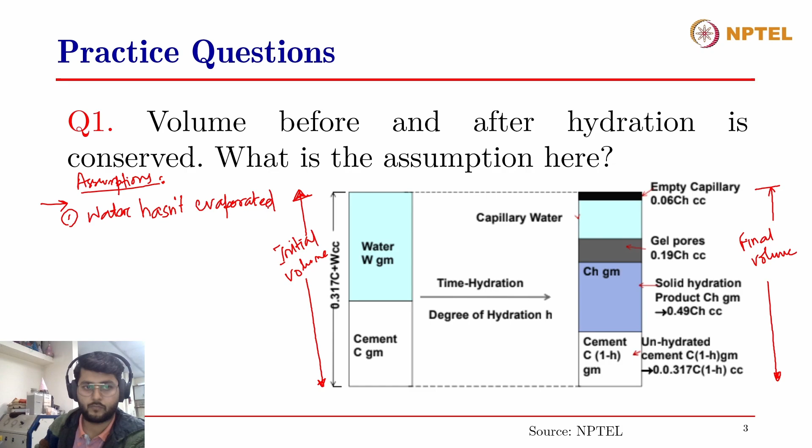Okay, one was answered by Divya - it is that water hasn't evaporated. We are assuming that. So when there is a change in volume, we call it in mechanical terms - or rather, a reduction in volume is called shrinkage, while increase in volume is called expansion. So we are assuming that there is no shrinkage occurring when we are doing volume conservation while talking about the before hydration and after hydration state of cement.

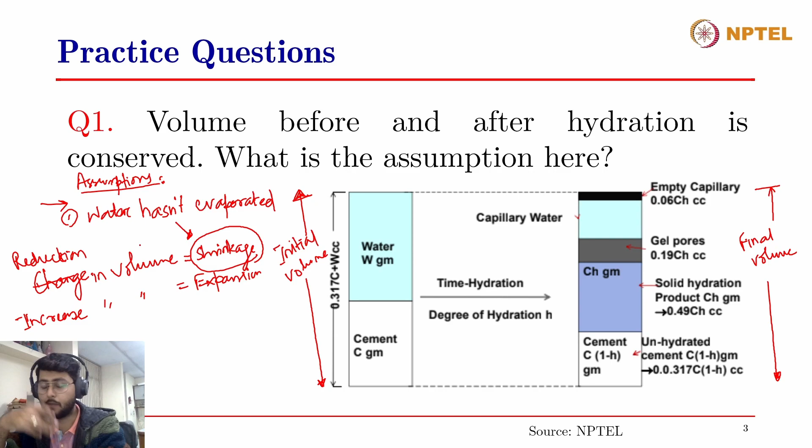So there are several types of shrinkage that cement can undergo during and after its hydration process. This starts with the first one, called chemical shrinkage. I'll briefly discuss all these types of shrinkage that we have assumed while conserving the volume, because these might also be discussed later on in the course.

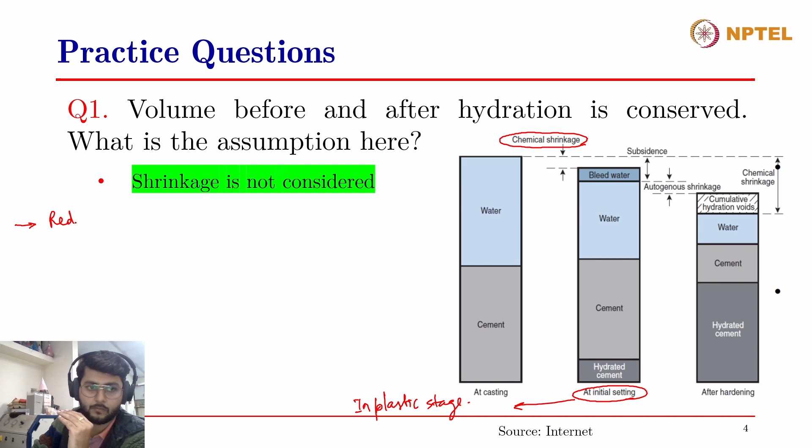So first is chemical shrinkage. What is chemical shrinkage? Does anybody want to answer? Okay, chemical shrinkage is when the cement is still in its plastic stage. The initial chemical shrinkage is the reduction in volume due to the formation of early hydration products.

So as we know, the volume of early hydration products is lower than unhydrated cement plus water. So this part is due to this - it is chemical shrinkage because the volume of hydration products is lesser than the total volume of the unhydrated cement plus water, right?

Now there could be bleeding. Let's say there is a certain amount of segregation. This is for the first type of shrinkage, chemical shrinkage. Then there could be bleeding in the mix as well - let's say your aggregates, there is segregation in the mix. Segregation is the settling down of heavier particles while the lighter matter comes on top. So your aggregates are trying to settle down, and the bleed water gets accumulated on the top, forming a film.

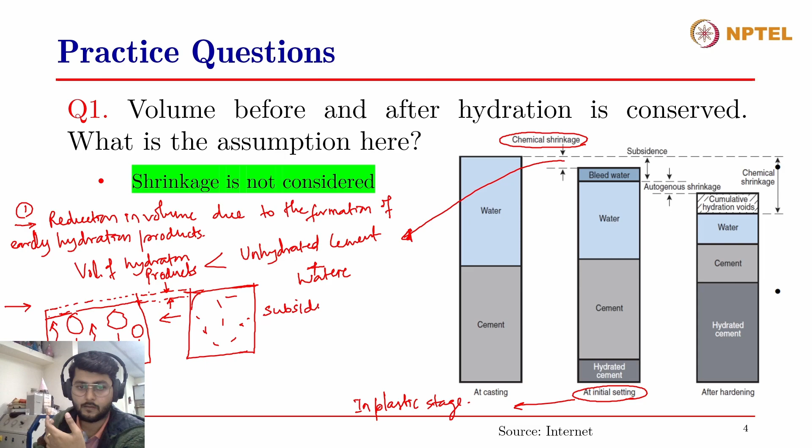And when this film is formed - initially the volume was this much, when you cast a cube or something, and this was a more or less homogeneous mix. But with time, due to segregation, the heavier particles have settled down, while the bleed water has accumulated at the bottom... no, on the top, and therefore this difference in volume is called subsidence. That is, the cement or concrete has now subsided or acquired a lower volume, while the top portion has been accumulated with water. So this is known as subsidence.

So this is the total of this - this is the first one, chemical shrinkage. Then, while it's just starting to set, this is the second one, subsidence. When the cement or the concrete is just starting to set, then there could be autogenous shrinkage.

And autogenous shrinkage is also known as self-desiccation - autogenous shrinkage after the setting is known as self-desiccation. This is when there is already a rigid framework of the hydration products, because it is already set. So there is already a rigid framework of hydration products, and since the cement is still undergoing hydration, it is taking water from the capillary pores. Since it is taking water from the capillary pores, there is a suction process going on, and therefore there's a shrinkage in the volume.

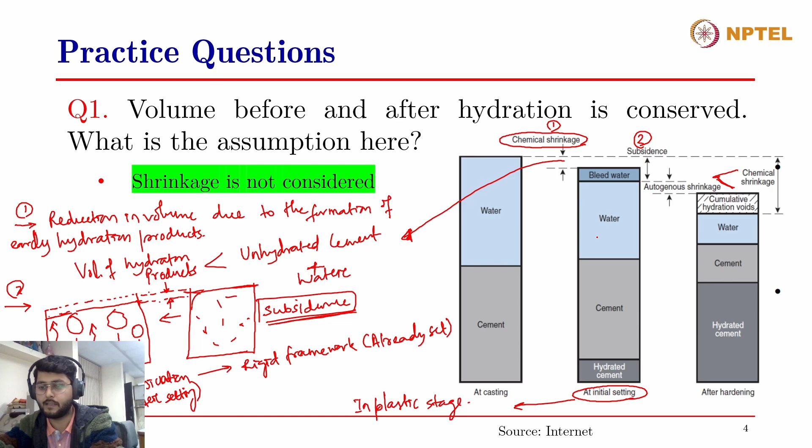All right, so these are the different types of shrinkage that occur within a few hours to one or two days of setting, right? Now we are going to look at other types of shrinkage that can occur up to years after the casting.

The first one is plastic shrinkage, which is basically drying of water when concrete is still plastic. It occurs within the first few hours of casting or after the addition of water.

Then comes thermal shrinkage. What is thermal shrinkage? Can anybody answer?

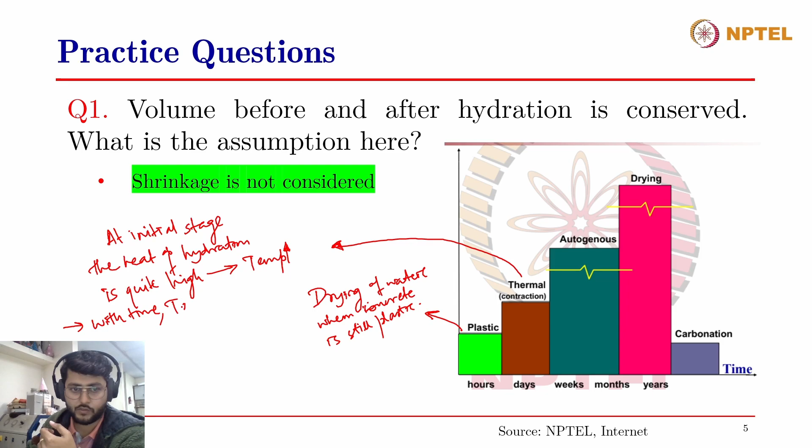Thermal shrinkage is basically when water is initially added to the concrete, chemical reactions like dissolution and precipitation occur at a very high rate, and therefore the heat of hydration at the initial stage is quite high, hence temperature is high inside the concrete. But with time, the temperature reduces. Now why? When the temperature is high, the volume is higher because volume expands when temperature increases.

But when the temperature is reduced, the concrete has cooled down several days after casting. Now that it has cooled down, the expanded volume wants to contract, so there is shrinkage. And since it has been several days after casting, the concrete has hardened. Now that it wants to undergo shrinkage, there might be cracking in the hardened concrete due to thermal shrinkage.

Plastic shrinkage also undergoes certain kinds of cracks. You can see this when you have cast a small sample, a cube, or some specimen, and left it open without sealing it, exposed to the environment. Certain map cracks are visible on the top surface of the cast sample, and this is due to the combined action of chemical shrinkage, autogenous shrinkage, and mainly plastic shrinkage, because the water on top is evaporating, so the top layer tries to shrink and undergoes small cracks on the surface.

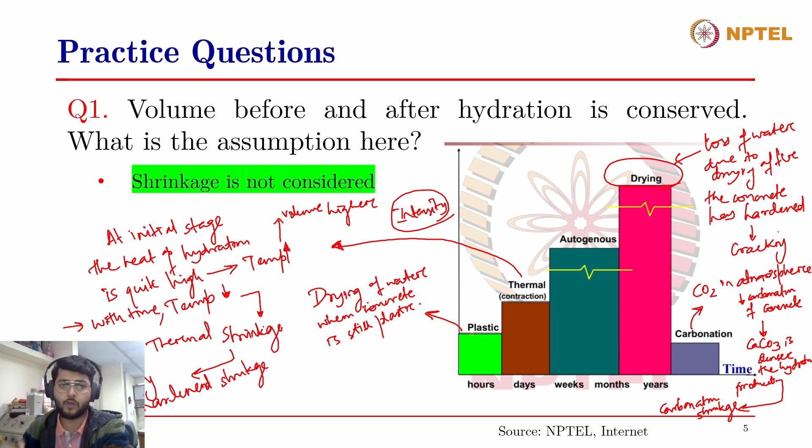So that answers our first question briefly. We discussed all the different types of shrinkage, and since shrinkage is not considered, we are able to conserve the volume before and after hydration. Moving on to the second question: what is the standard consistency of cement paste? It is the water at which one of these options is correct, and you have to pick: optimum workability is obtained, full hydration occurs, open air voids are isolated to air bubbles, or maximum strength is achieved.

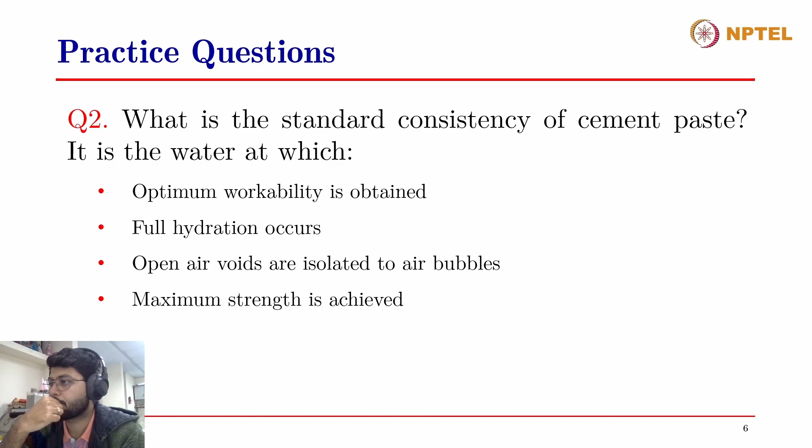I think full hydration occurs at standard consistency. How, why do you think so? Sir, standard consistency determines water content. Okay, what water content? It is the water required to produce the cement paste, which I think is 30% of weight of cement. So do you say that at 30% of weight of cement, meaning a water to cement ratio of 0.3, full hydration can occur? I don't know sir, please elaborate. Okay, thank you for attempting. Anybody else wants to try?

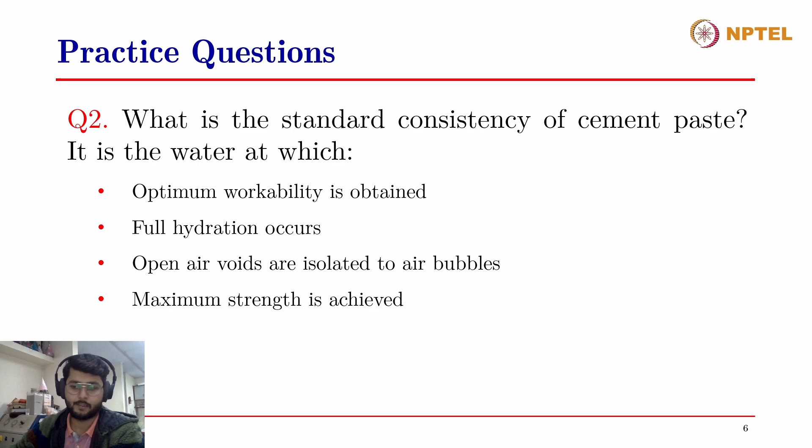All right, so the correct answer to this question is: open air voids are isolated to air bubbles. This is also discussed in the lecture as well.

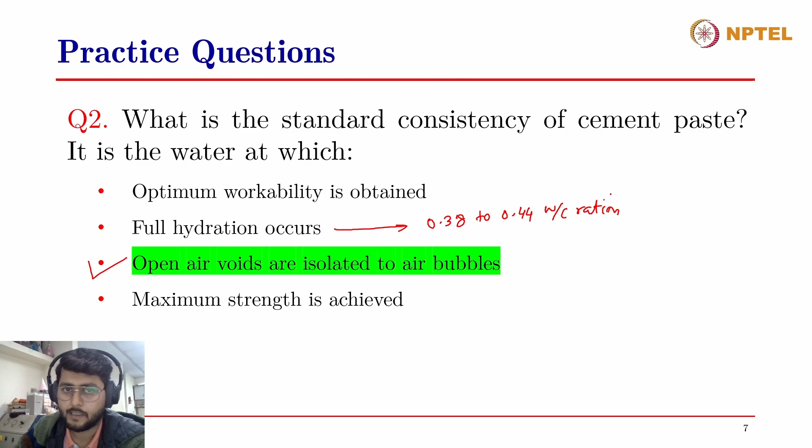It is not about full hydration. Full hydration, as you might have seen in the lectures, occurs around 0.38 to 0.44 water to cement ratio. And typically, the standard consistency of OPC, ordinary Portland cement, ranges between 26% to around 32%.

So this is not about full hydration. No, this is the wrong answer. Optimum workability is obtained - again, workability is a very subjective term, as workability is subjective to the kind of application that you're looking to make the concrete for.

For example, if it is a slab that you're going to cast, then you would want the workability to be such that the slump would be of that of a flowable concrete, let's say around 150 to 180 slump, and you'll be able to pump the concrete because there will be a congestion of the steel reinforcement on the slab or the raft. So you want your concrete to flow on its own and occupy all the spaces so that you'll have a perfect shape of the concrete element, as well as your voids will also be reduced.

There will not be any kind of honeycombing in the concrete element. So for a slab, you would want your workability to be such that the slump is around 150 to 200. But if it is a roller compacted concrete for a pavement, then you would want your slump to be zero. So in that case, the zero slump concrete is a workable concrete. But will that concrete work in the case of slabs? No, a zero slump concrete in the case of slabs is considered bad - it's a less workable concrete.

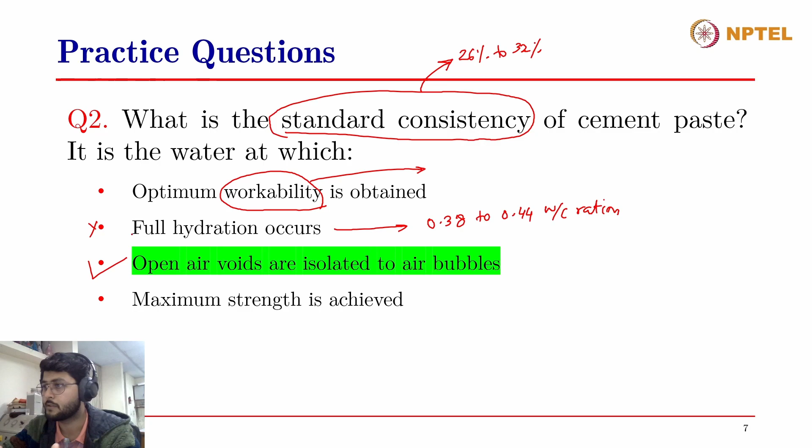While if it is a flowable concrete - we generally confuse flowable concrete and workable concrete. Flowable is the degree of flowability, or how high the slump is, in very crude terms. But workability is very subjective; it is related to the kind of application that you're looking for. If it is a stiff concrete that you want to make for a pavement, then you want a stiff concrete, and therefore the stiff concrete in that case is a good workable concrete. You don't want a flowable concrete there, like for a slab.

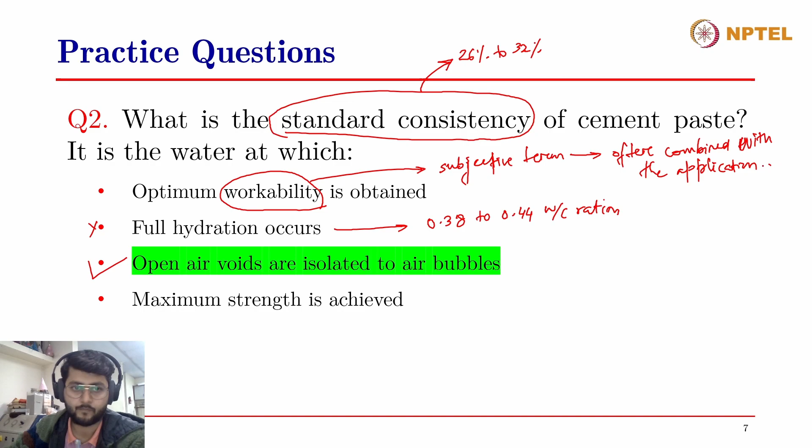So that's what it is - this is a subjective term, and often combined with the application of concrete. So optimum workability can only be defined when you're able to define the application. And standard consistency is a constant value for a given type of cement, and therefore optimum workability is not the right option.

Then comes: maximum strength is achieved. Strength - and this is the ultimate or later age strength I'm talking about - depends on a lot of factors. One could be degree of hydration, and the major factor that governs strength is porosity, because if the voids are less inside the concrete, then the strength will be higher, and so on. So there are a lot of factors that govern the strength, and not just the standard consistency of cement paste will ensure that the maximum strength is achieved.

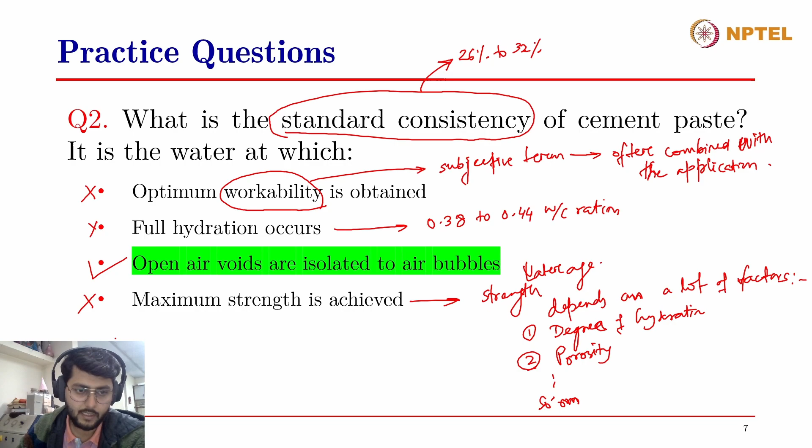So it is not the right answer. The right answer is: open air voids are isolated to air bubbles. This was also shown to you in the lecture as well. Let's say these are the unhydrated cement particles inside a given matrix, and this used to be the air void.

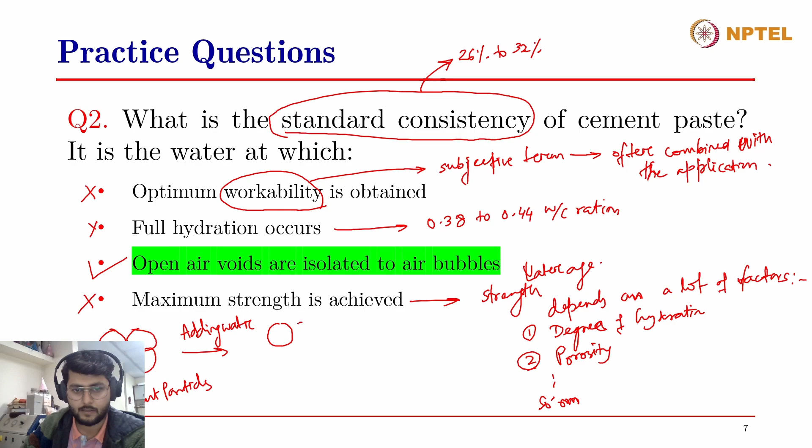Upon adding water, what happens is this void trapped between these particles is slightly filled by water, while there is still air entrapped within the voids, and it is connected - the air voids are connected.

But when the cement is at its standard consistency, what happens is the connectivity of the air voids is lost. The water takes most of the void volume, and the air voids are reduced to air bubbles. So the connectivity of air voids is lost.

Now what happens when the connectivity of air voids is lost? The water surrounds the air voids, and they turn into air bubbles. There's a lubrication layer between the air voids and the cement solid particles. This lubrication water within the solid particles allows them to move around, providing consistency and increasing the level of compaction inside the paste.

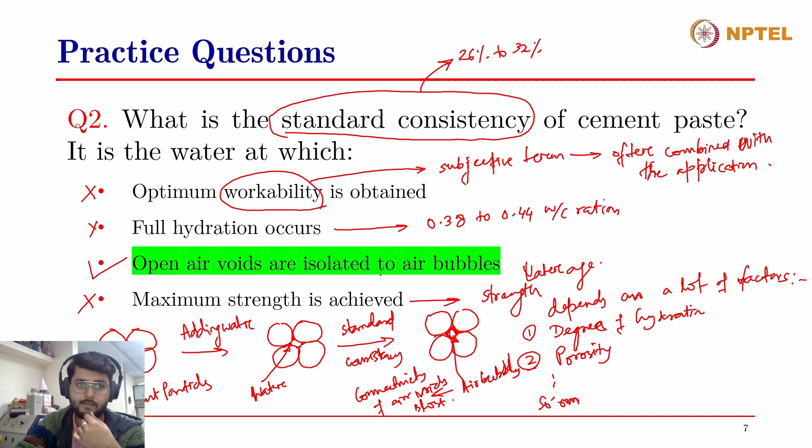Moving on to the third question. Fineness and specific surface area values can vary with the choice of method of measurement. You have seen two different methods: one is the Wagner method, and the other is the Blaine's apparatus method.

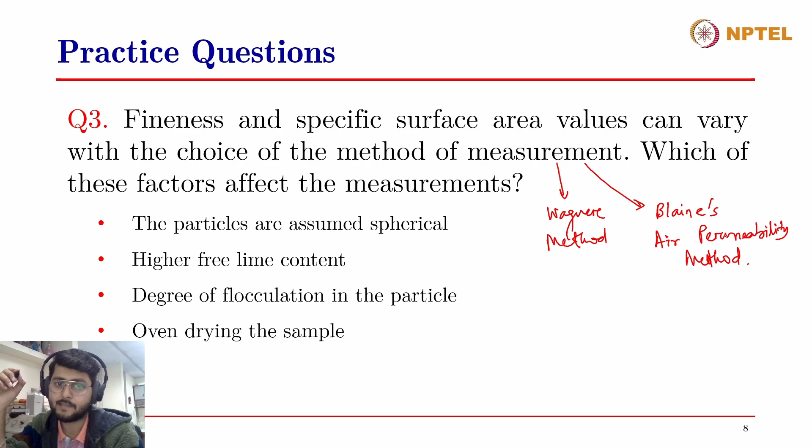Now the question is, which of these factors affect the measurements of specific surface area and fineness? The options are: the particles are assumed spherical, higher free lime content in the material, degree of flocculation of the particles, and oven drying of the sample. Which of these factors are expected to affect the measurements of fineness and specific surface area of cementitious materials?

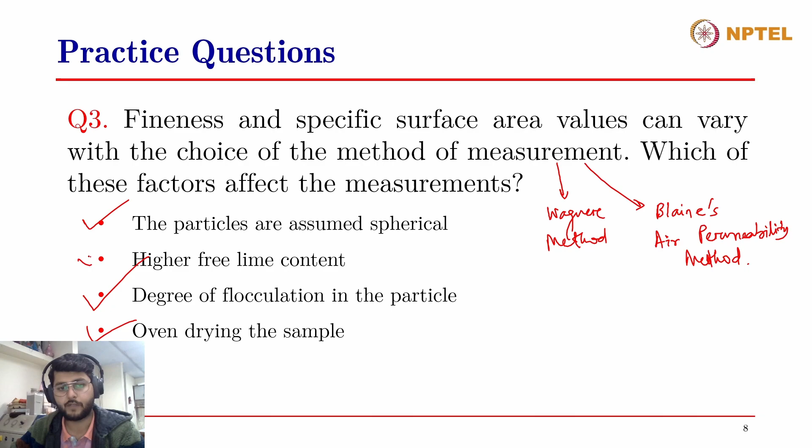All right, the correct answers to this question are: the particles are assumed spherical, and the degree of flocculation in the particles as well—not the free lime content. We'll discuss all these parameters one by one.

The first is that the particles are assumed spherical. I want to ask you this question: do cementitious materials have spherical particles? Let's say cement, clinker, silica fume, slag, fly ash, metakaolin, different SCMs. So do these types of SCMs have spherical particles?

Yes, only in the case of fly ash and silica fume, except for some other ashes—let's say volcanic ash and some other ashes. Except for these cementitious materials, all other materials mostly have irregularly shaped particles.

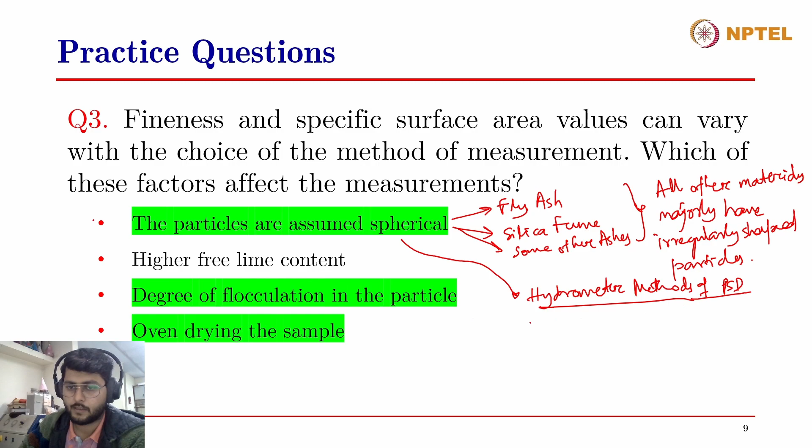You would have seen in the case of the Wagner method or the normal hydrometer method—the hydrometer method of particle size distribution—it assumes that particles are spherical and is based on Stokes' law. Based on the different sizes of particles, they will settle down and remain suspended at different depths in the water column, and from that you'll be able to calculate the particle sizes.

So the calculation assumes that all particles in the system are spherical, and this will also affect the results of fineness and specific surface area, because in most cementitious materials—clinker, limestone, slag, gypsum, cement, or metakaolin—the particles are irregularly shaped. Assuming them as spherical would only be an approximation and would not give us accurate results.

The second factor is the degree of flocculation in the particles. When the particles are in a flocculated state, air is entrapped in these particle flocks. If the particles are not dispersed properly, if these flocks are not broken, then the particle size distribution measurement will be affected.

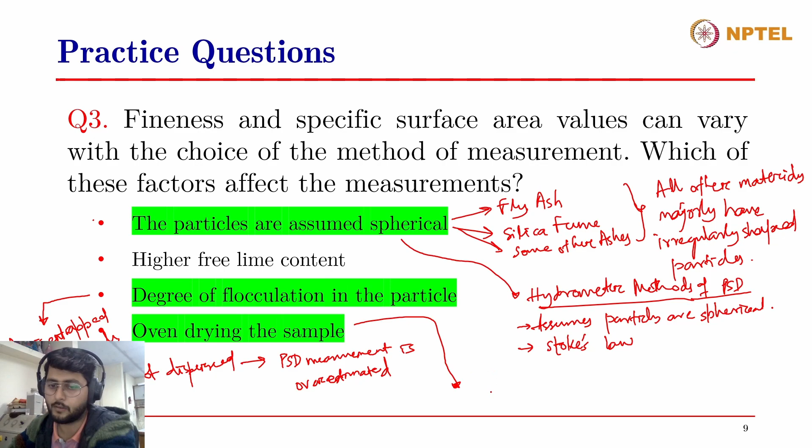Overestimated, right? And then the third is oven drying the sample. If the sample has some moisture in it, this moisture will also be entrapped in the air that is entrapped within the flocks of the particles, and that will get released in these measurements. This might also affect, depending on the specific gravity of the fluid, let's say in the hydrometer method, on the type of fluid you're using to measure the particle size distribution of your cement. That will also affect the measurements. So you don't want moisture present in the sample, and therefore oven drying is a must requirement for preparing your sample before carrying out this fineness test.

So moisture also affects the PSD measurements, right?

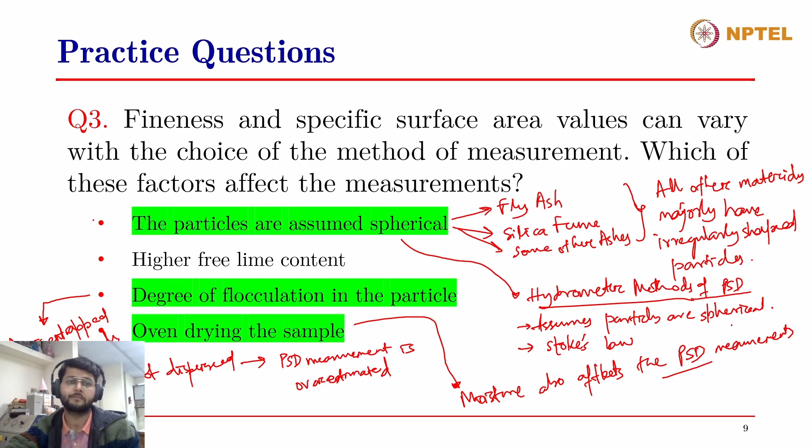Moving on to the fourth question: which factors can affect the specific gravity test of the cement using the Le Chatelier's flask? The choice of medium, kerosene or water; free moisture in the material; high C3A content in the cement; air voids in the material. Which of these options are correct?

Anybody wants to answer this question? The choice of the medium in which you carry out the specific gravity test, meaning it could be water, kerosene, or something else, will that affect the specific gravity test? The free moisture that is available within the material, will that affect it? High C3A content in the cement, the composition of your cement, will that affect the specific gravity test? And then air voids in the material, will that affect the specific gravity test?

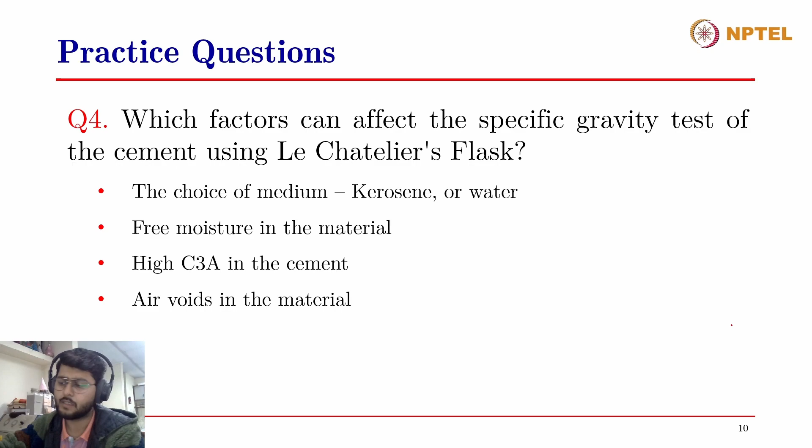Alright, the correct answers to this question are the choice of medium, kerosene or water; free moisture in the material; and air voids in the material. It could not be related to the C3A, as there is no known correlation between C3A content and specific gravity of cement.

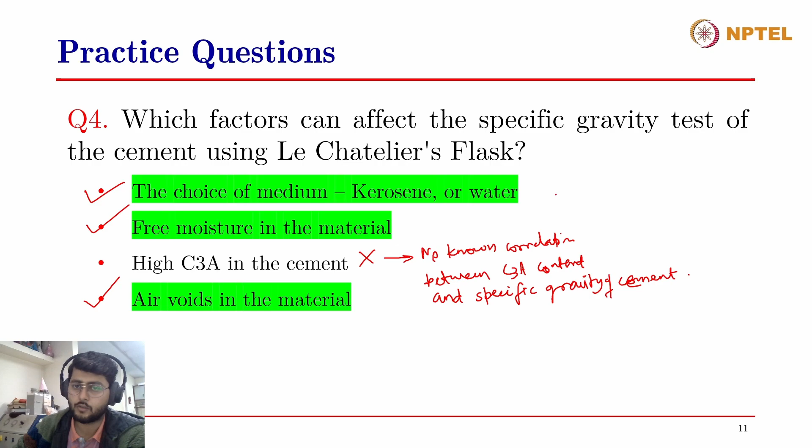Yes, of course the choice of medium affects it, because you can't carry out specific gravity tests in a water medium—it will react with the water, as you might know. So we use a medium that is inert. Kerosene is inert to cement, so the cement will not react, and this medium helps us carry out this test. The choice of medium affects this test.

Then the free moisture in the material, as discussed in the fineness measurements as well—if there is free moisture in the material, this moisture will get released into the kerosene, and since kerosene and water are not miscible, it will affect the specific gravity. So you need to oven dry the material prior to carrying out your specific gravity test.

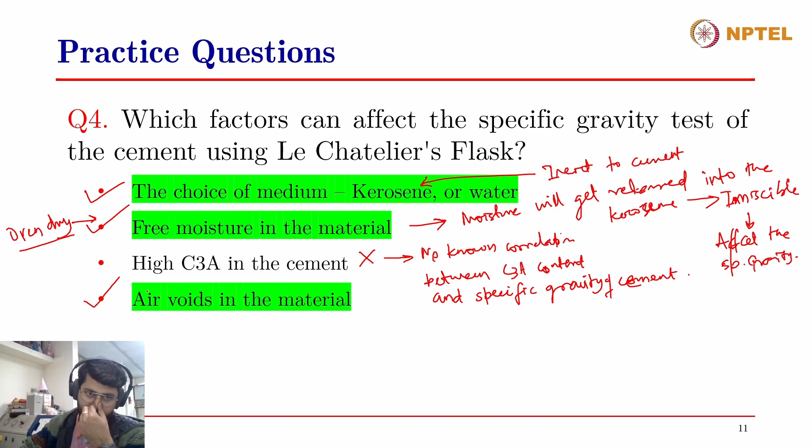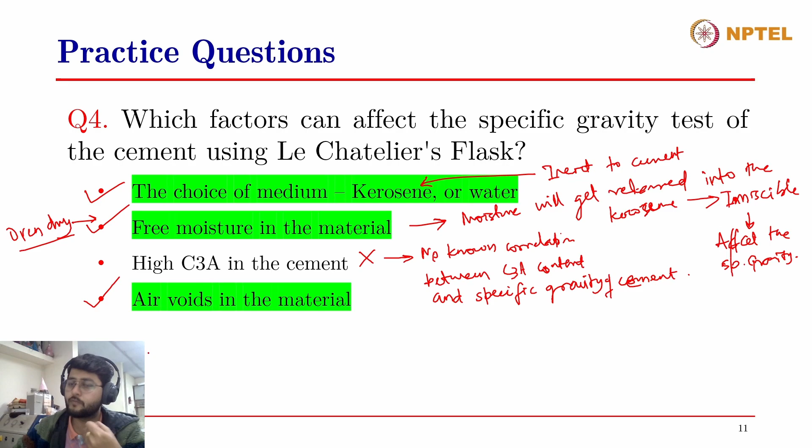The final one is air voids in the material. Yes, of course, when the cement is in its anhydrous state, when you take it out from a cement bag, it will have air voids within the solids. When we put it in the Le Chatelier's flask in the kerosene, we need to remove these air voids that are entrapped within the flocks or within the solids, because that will contribute to the volume measurement. If the air voids are not released, they will contribute to the volume calculations, and hence specific gravity will be affected.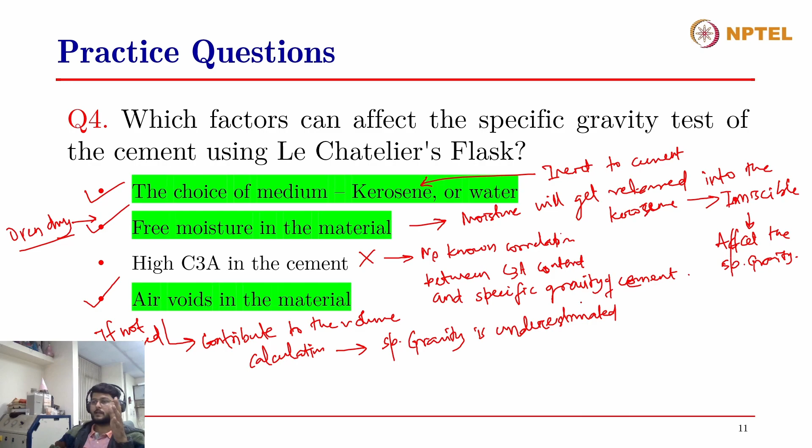Specific gravity is in fact underestimated, because if there are air voids trapped within the kerosene, there will be a higher volume change with a given amount of material, so the mass to volume ratio will be lower. We need to release these air voids so that we get the accurate specific gravity, so that the mass to volume is as accurate as possible—otherwise the specific gravity will be lower if there are air voids entrapped within the system.

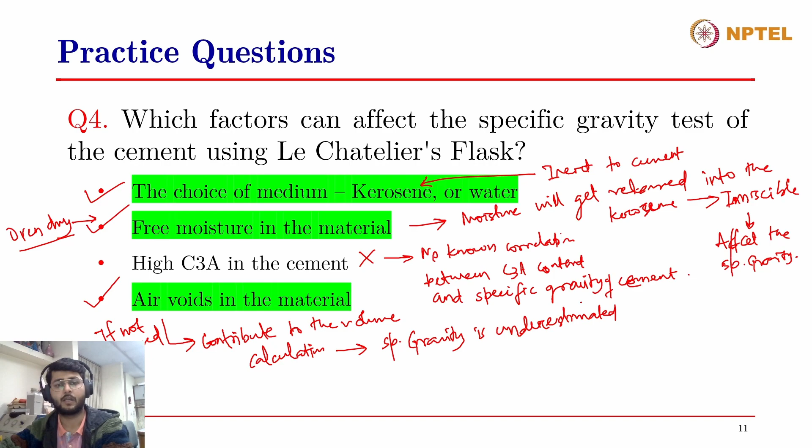Moving on to the fifth question: what contributes to the high early strength and rapid hardening in rapid hardening Portland cement, or RHPC? Is it the high belite content? Is it the high alite content? Is it the higher fineness or high aluminate content? Which of these options contribute to the high early strength and rapid hardening properties of RHPC? High belite content, alite content, higher fineness, high aluminate content. Anybody wants to answer this question?

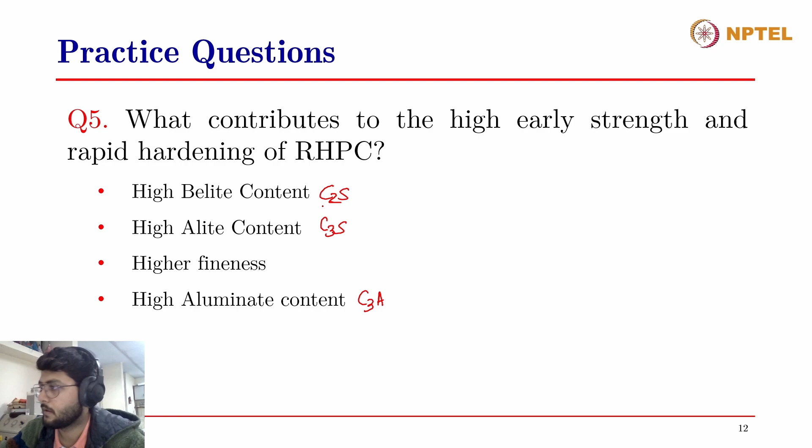Anybody else wants to try? Okay, the correct answer is actually high alite content, higher fineness, and high aluminate content, not the high belite content. You might have seen this in the previous week's lecture as well. So I'll just draw it over here for clarity.

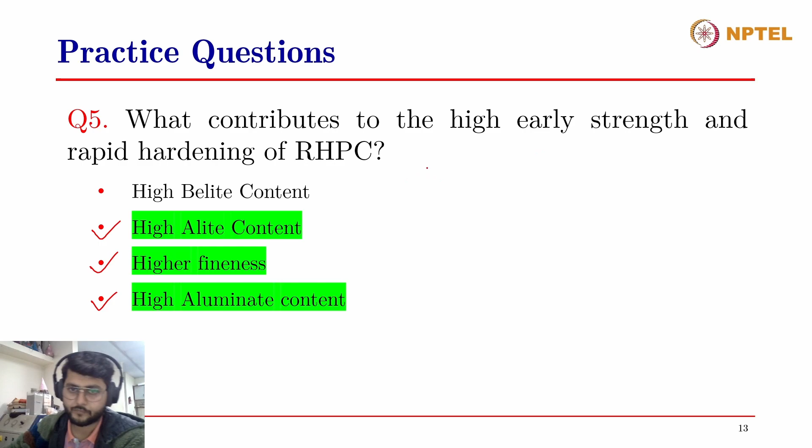This was a picture we also discussed in the last session - a typical compressive strength development of pure Bogue phases. This is time on a log scale: 28 days, 56, 90, and so on. In the pure Bogue phases, for alite, the strength development goes like this. This is C3S.

In the case of belite, the strength development goes a little slower initially, but it catches up with alite at the end. So this is belite. But in the case of aluminates or ferrites, the strength development is limited to like this.

So you can see that around 28 days, or in the case of early strength, the only factor that contributes to early strength is alite. Alite contributes to early strength. On the other hand, Belite contributes to later age strength, while aluminate does not contribute much to the strength.

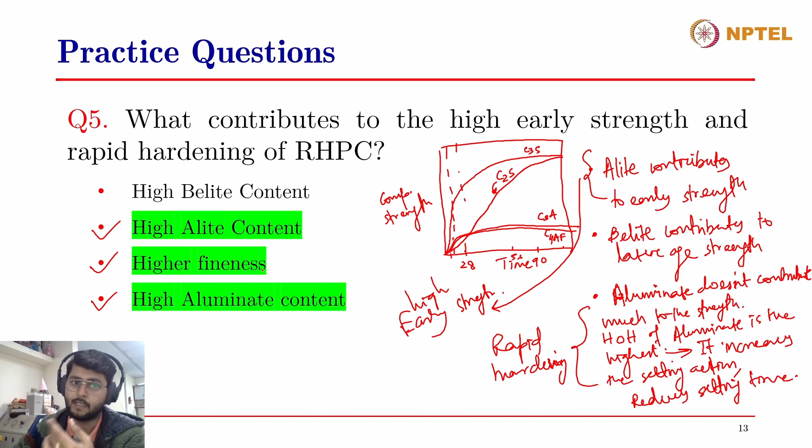But you'd have also seen that when we compare RHPC and OPC, the alite and aluminate contents are almost similar to that of OPC. So what contributes to the higher early strength then, if the alite and aluminate contents are still comparable with OPC? It is the higher fineness. So the last option is higher fineness.

Typically, when a cement is finer, it will have a large surface area. These large surfaces will act as sites for the hydration products to get deposited on them, and the dissolution action will also be accelerated when the surface area is higher. So higher fineness of cement increases the rate of dissolution of clinker phases.

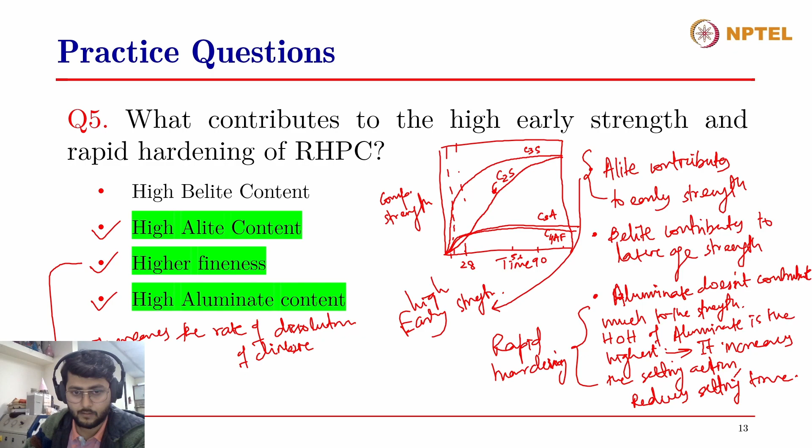So higher dissolution means a higher rate of hydration, and the higher fineness will also provide high surface area for the nucleation of hydration products. So therefore these three answers are the correct answers to this question, right?

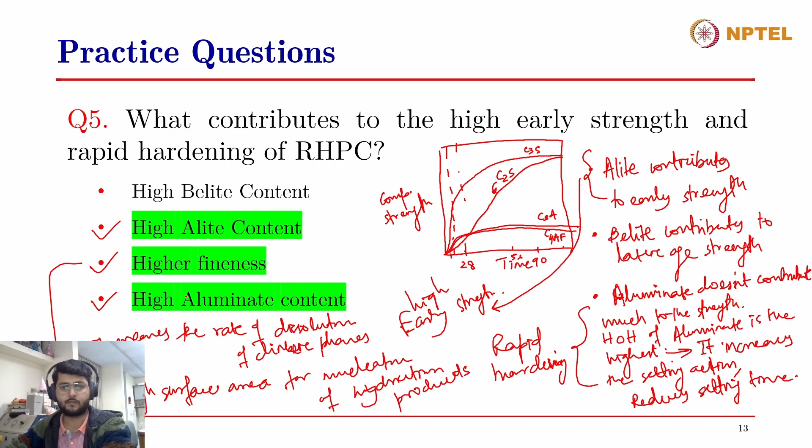Moving on to the sixth question: why is low heat cement used in mass concreting applications? This question doesn't have any options, so we would like to discuss it in detail as much as we want. Why is low heat cement used in mass concreting applications? Anybody wants to try?

What is low heat cement? Can anybody answer this question? What does the name suggest to you - low heat cement? Reduce the thermal cracking used.

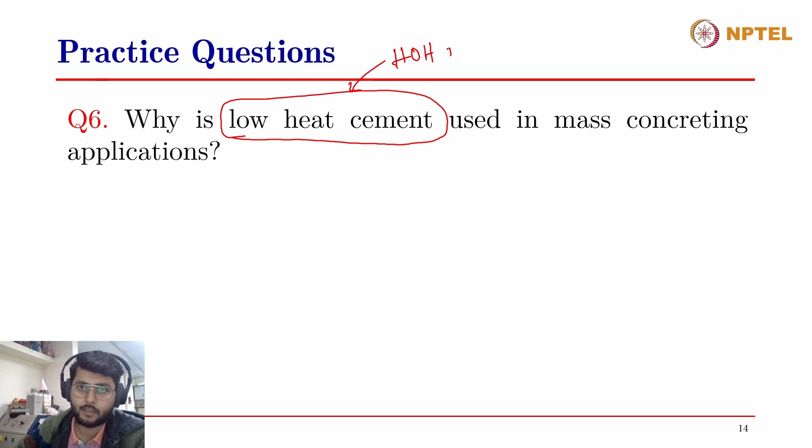Yes, I mean, you can say that in a sense. So, not going towards cracking, but low heat cement basically releases a low amount of heat - the heat of hydration is low. Since the heat of hydration is low, the amount of heat getting released while the cement gets hydrated is less, and therefore it is called low heat cement. Now, why is it used for mass concreting applications? What is mass concreting? Can anybody tell me?

You have seen this in the lecture as well, that in the case of mass concreting applications, we want to use low heat cement. What is mass concreting?

Mass concreting is basically where the size of the column elements, or the size of the concrete elements, is huge.

For example, piers that are built in rivers, large piers, dams, retaining walls, all the thick structures, thick rafts. The size of the elements are huge, right?

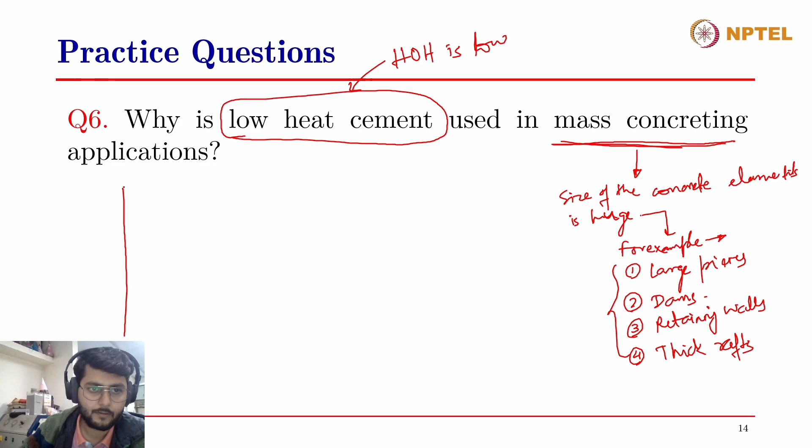Now, what happens in mass concreting applications is that since the thickness of, let's say we're considering a retaining wall, and it's huge, it has a high thickness, and the thickness is very, very high, right?

When the thickness of an element is too high, what happens is when the cement is added with water, it undergoes hydration, so heat is released. The heat is also released from the surface during hydration, while there is also heat being generated in the core of the structural element. This is the surface heat, and there is core heat.

Now, the surface heat has a way to get dissipated into the atmosphere, right? The surface is directly in contact with the atmosphere, so this heat can get dissipated from the structure. So the surface has a relatively low temperature at the surface. On the other hand, the temperature at the core is high, and therefore the core is now trying to expand - expansion in the core - while since the surface is at a lower temperature, it is trying to contract.

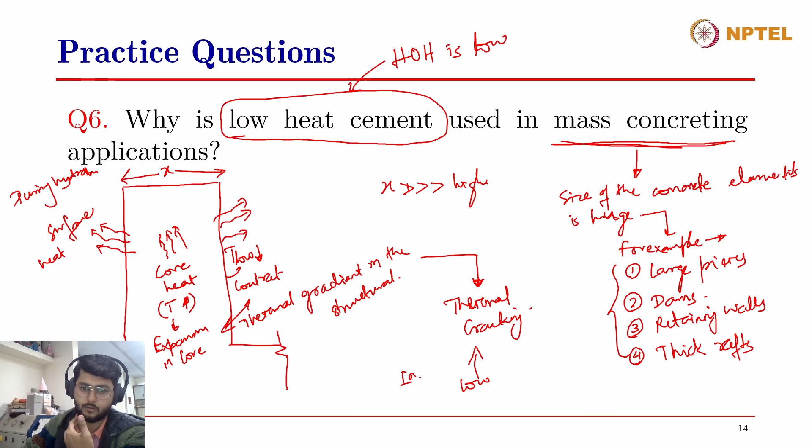So what is the solution to this? We introduce low heat cement. So when the heat released in the cement is very low, the thermal gradient will still be present because the surface is still exposed to the atmosphere, so it will have a lower temperature, while the core will have a slightly higher temperature, but the thermal gradient won't be sufficient enough to accentuate or accelerate the cracking in the structure. So therefore we want to use low heat cement.

Now what is low heat cement? Basically, as we mentioned, the heat of hydration is low. So heat of hydration will be low when the C3A content is low. So typically low heat cements contain low C3A content, low alite content, and high belite content.

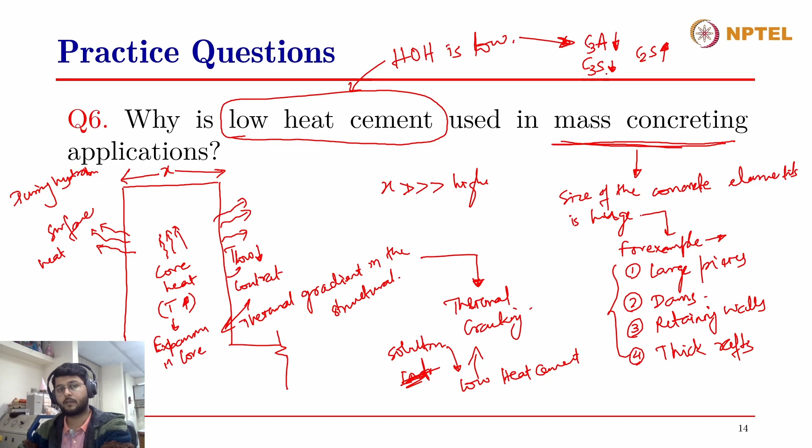Because we want ultimate strength in it, so we want a later age strength. We don't want it to harden, or we don't want it to have a high heat release in the first few hours of the pouring of concrete. So we want to keep the heat of hydration very low, so we reduce the aluminate content and the alite content, while we keep the belite content high, so that it will ensure a high later age strength as well. So this is why we use low heat cement for mass concreting applications.

Moving on to the seventh question: why does sulfate resisting cement require low C3A content? These two questions, sixth and seventh, are quite related to each other, meaning that low heat cement has lower C3A content, and sulfate resisting cement requires a low C3A content as well, lower aluminate content. What is the answer to this question? Why does sulfate resisting cement require a low C3A content? What is sulfate resisting cement?

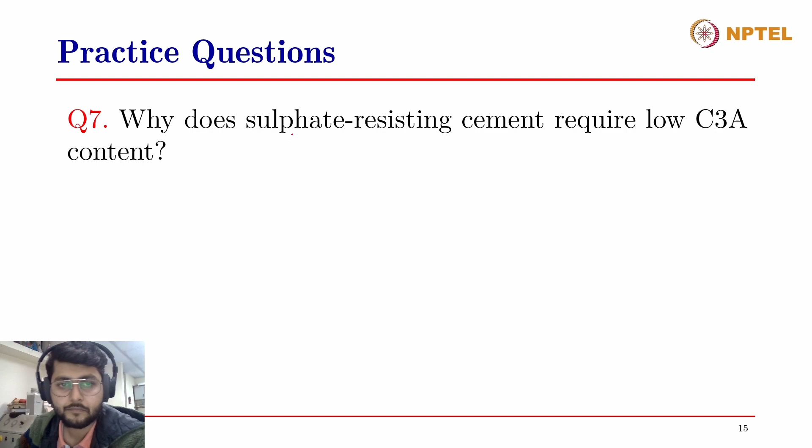Yes, anybody wants to try? These all have been discussed in the lectures, week 2 lectures. What is sulfate resisting cement? What does the name suggest to you?

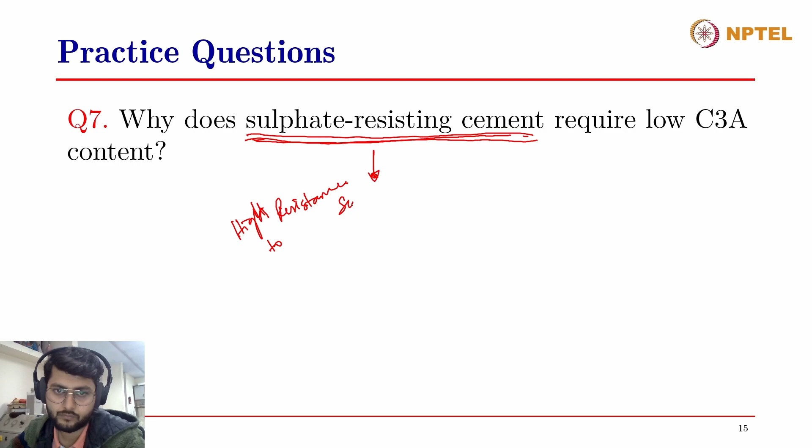What is sulfate resisting cement? It is a cement that resists sulfate attack, that has high resistance to sulfate attack.

Now, why does sulfate resisting cement require a low C3A content? What happens when there is a high C3A content and sulfates are induced at a later age to the concrete? What happens? Where do sulfates come from?

When we increase the C3A in concrete, deterioration is caused. How is the deterioration caused in the case of sulfate attack? What kind of deterioration occurs when there is a high C3A and there is a sulfate attack on the concrete?

Thank you, Vivek. So if the C3A content is high, and sulfates are introduced after the concrete has hardened, C3A plus sulfates will give rise to the formation of ettringite.

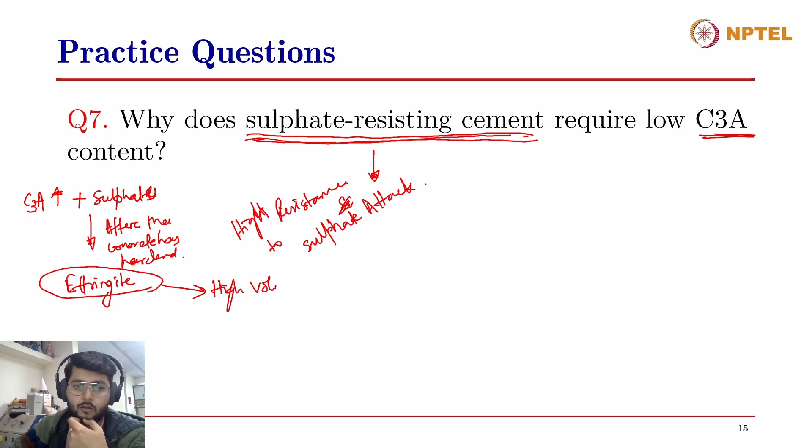And this ettringite has a high volume. When it precipitates in hardened concrete, it creates cracking. It induces cracking in the concrete.

So ettringite is not necessarily bad for us. We want ettringite to be formed in the system when the concrete is still flowable, in a plastic state. When ettringite is formed in the plastic state, which is the fresh state of concrete...

...ettringite formed in fresh concrete can occupy as much space, as much volume as required, because the concrete is in a plastic state, so there is high porosity, a high amount of voids in the concrete, and the concrete can readjust itself to the volume taken up by the ettringite.

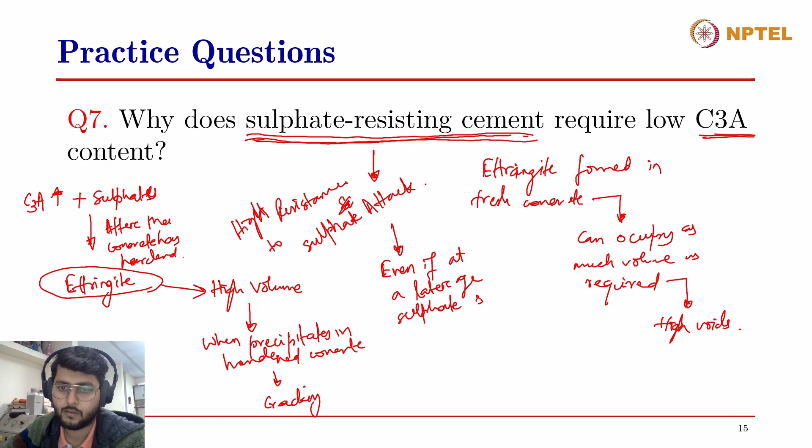So that even if at a later age sulfate is introduced to the system, C3A will not be available in sufficient quantities for precipitation.

So if the C3A content is low in the cement itself, then even if sulfate is introduced into the system at a later age, there will not be enough C3A left, and the C3A already present in low amounts will already be hydrated in the fresh state itself. So there will not be any unhydrated C3A left for ettringite precipitation to occur at a later age.

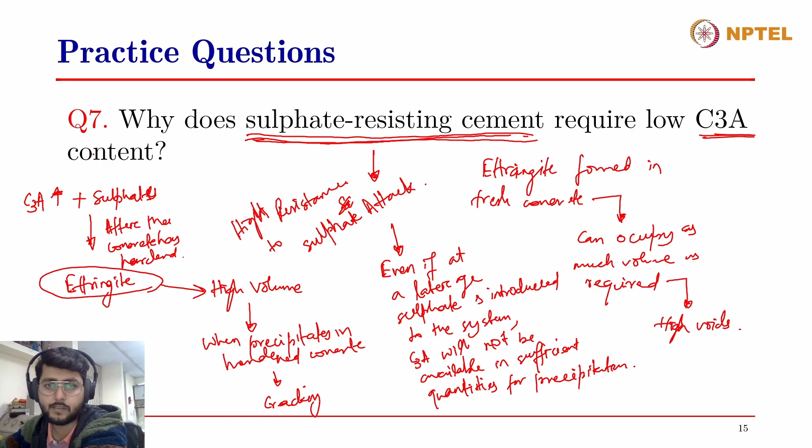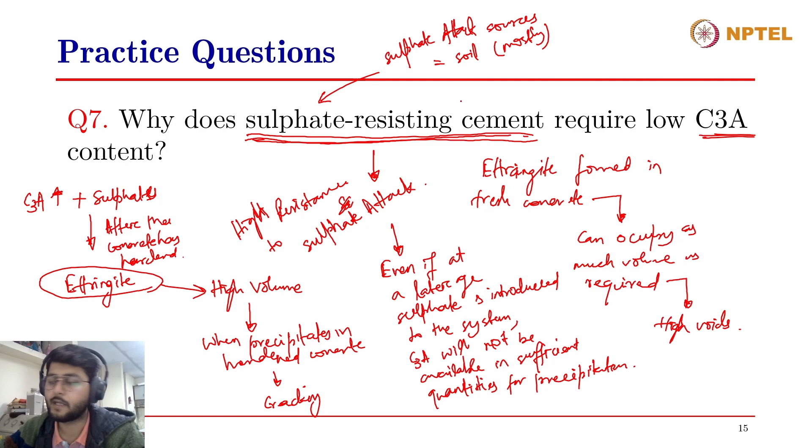Now, where do sulfates generally come from? How does sulfate attack occur? Sulfate attack sources are generally soil. So when the concrete element is to be made in contact with soil, we want to use sulfate resisting cement, so that when the concrete is in contact with soil, sulfates continuously coming or getting sucked from the water coming from the soil into the porous concrete won't affect the microstructure, because the C3A content will be low.

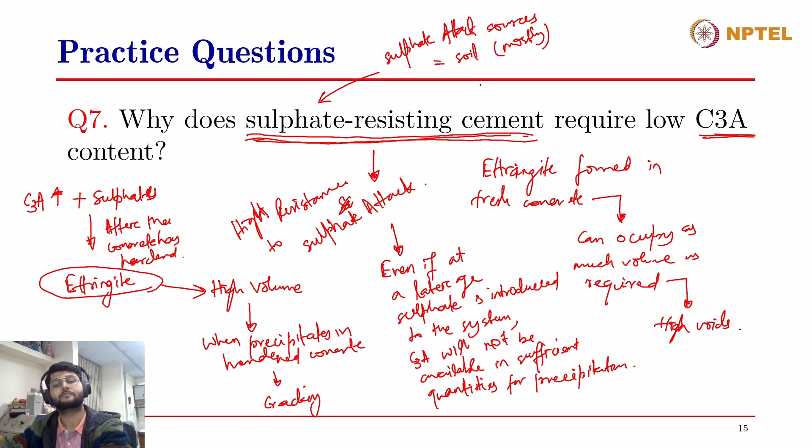Moving on to the eighth question: what is the difference between quick set, false set, and flash set? This is an interesting question. You might have heard about these different setting phenomena occurring in cement.

These are the basic three types of setting that generally occur in cement. What are the differences in terms of composition of the cement, or the relative concentration of ions in the cement or pore solution, that leads to these different types of setting behavior: quick set, false set, and flash set? What is the difference, and what leads to these different kinds of setting behavior in cement?

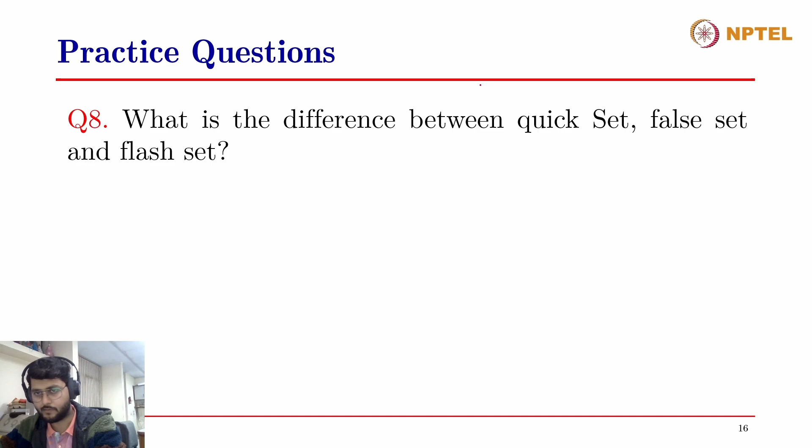What are these different types of sets? This might not have been discussed in the lecture till now, but we'll go ahead and discuss this. This is a very interesting phenomena that occurs generally in the setting of cement. These three different types of set are related to the relative concentration.

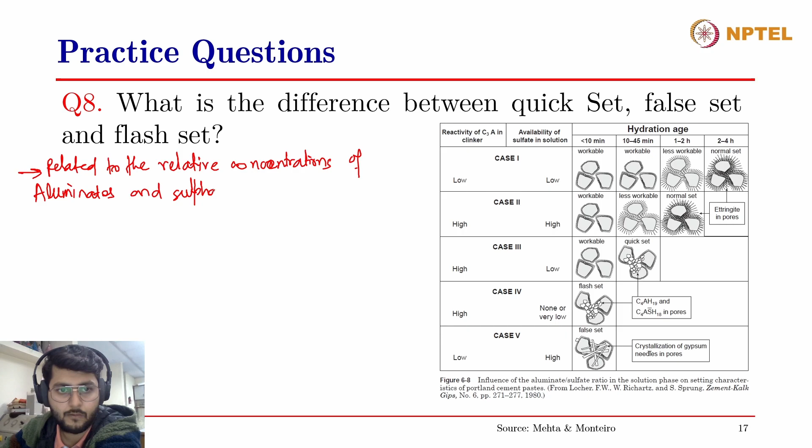Related to the relative concentrations of aluminates and sulfates in the cement. In the view graph on the right, taken from the book written by Mehta and Monteiro, this presents five different cases: the reactivity of C3A in the clinker and the availability of sulfate in the solution. Depending on the relative reactivity of the C3A and the relative availability of sulfate in the solution, the setting behavior is governed.

As you know, why do we introduce sulfates to cement or clinker? Why do we add gypsum to clinker? Because aluminates have a tendency to set very quickly. So if we don't provide enough gypsum or source of sulfates, it will form these hydrogarnet-like structures, leading to a very fast setting of the cement. Therefore, we want to have sulfates in the system.

In case 1, when the reactivity of the aluminate is low and the availability of sulfate is also low, we will have a high open time, higher workable time, longer workable time. Case 1: low and low. This leads to longer workable time, because since the C3A content is itself low, the cement remains workable for longer times, let's say 2 to 4 hours, and then after that normal setting occurs.

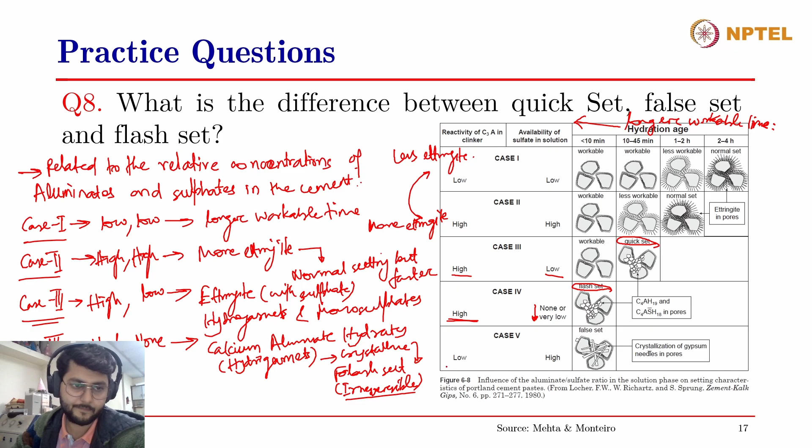The final case is that of a false set. When the C3A content is low but there is too high an amount of sulfate available in the system, these sulfates combine with the calcium coming from the different clinker phases and precipitate gypsum, and this gypsum leads to a false set. This false set is however reversible, meaning that if you rapidly mix the cement again, it will not set, and you can carry out the testing of the setting time. It will first show a false set, looking like the cement has set, but if you continuously mix it for some time, the precipitation of gypsum and the network will be broken, and you will be able to work with the cement and concrete. This is called a false set.

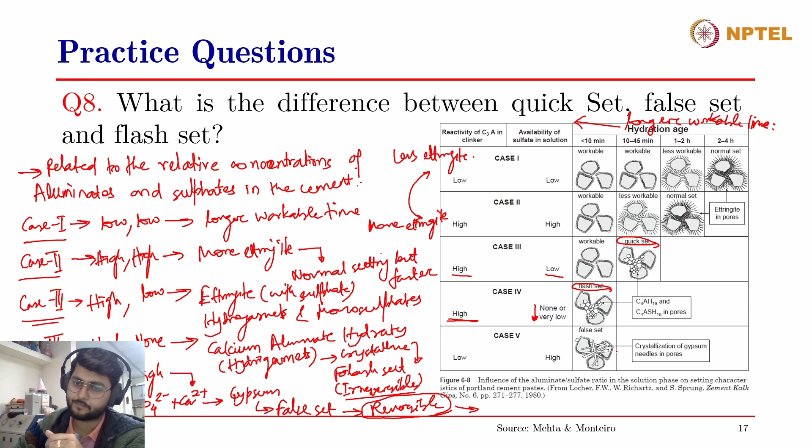So this is the difference between the different types of setting phenomena that occur in cement.

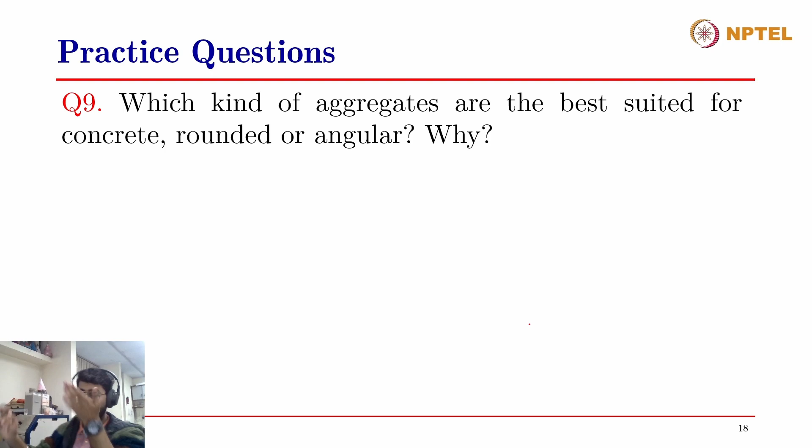Moving on to the ninth question, probably the last question of the session. Which kind of aggregates are best suited for concrete, rounded or angular, and why? You might have seen, and we have also discussed this in the lectures as well.

Rounded aggregates are formed from natural phenomena, like weathering, where the sharp edges of these aggregates get rubbed against different particles in nature, and therefore they get smoothened and rounded in shape. Whereas crushed aggregates are generally angular because they are crushed in a crusher, a jaw crusher. Which type of aggregates are best suited for concrete and why?

Angular aggregate. Angular aggregate is better for concrete. Why? Yes, sir.

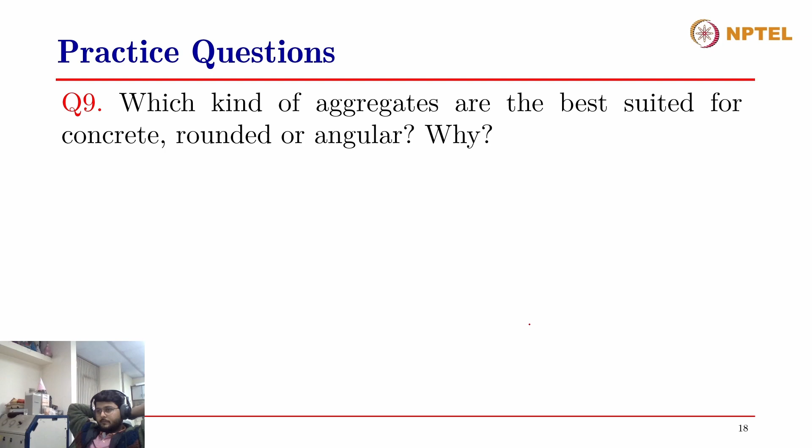Sir, angular aggregate is better as compared to round aggregate because of the interlocking effect in concrete. Interlocking effect, right? Beautiful, thank you.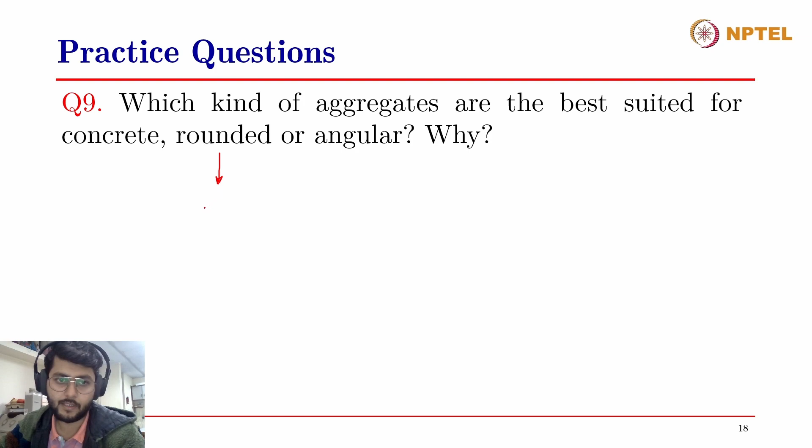Rounded aggregates, as I mentioned, come from natural aggregates or pebbles, weathered to a smooth texture and rounded edges by natural forces.

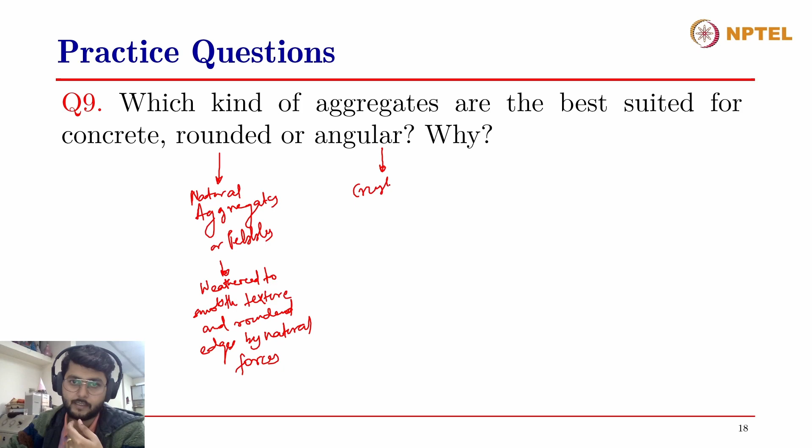On the other hand, angular aggregates come from crushed aggregates in a jaw crusher. Boulders are fed into these jaw crushers, and the crusher crushes them into different sizes of crushed aggregates.

Now, there is no direct answer to this question of which kind of aggregates are best suited for concrete, because we know that when the angularity of aggregates increases, this decreases the packing density, and therefore the void ratio increases, since round aggregates have the best packing density.

What you're trying to say is, in order to increase the packing of the aggregates, you have to use different sizes of aggregates. It has to be a well graded material, so that the lower sized particles fill the voids while the higher sized particles maintain the shape. On the other hand, if we are talking about the same size of aggregates, then angularity increases the void ratio and decreases packing density, whereas rounded aggregates of the same size provide the best packing.

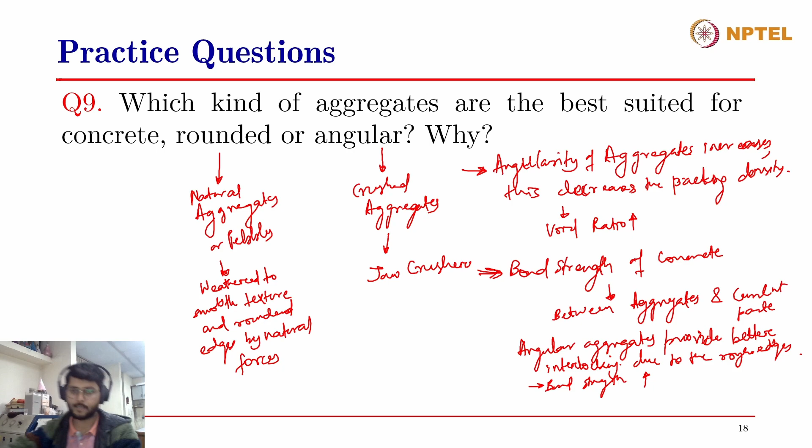So this answers the last question. Thank you, if you have any questions. That ends today's session.